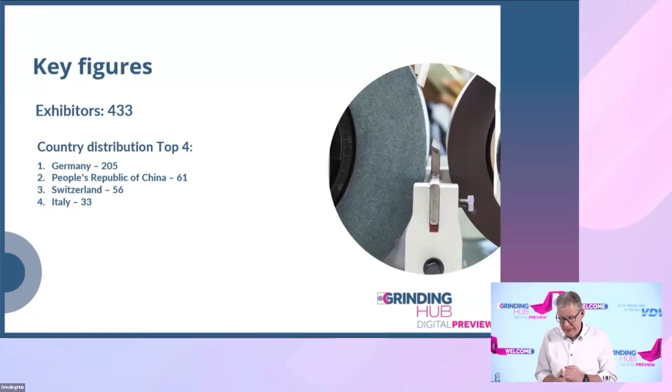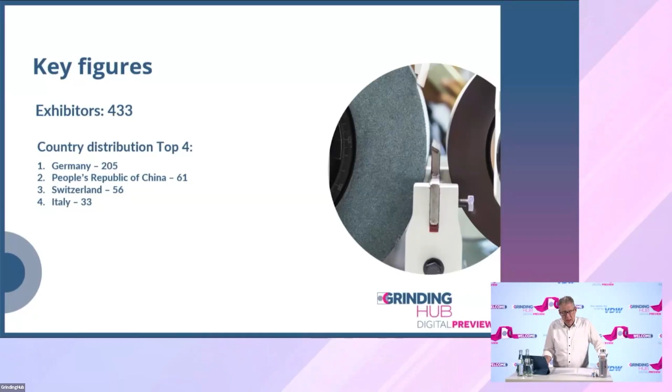Together with Swissmem, and the Grinding Pavilion Switzerland and small companies from Switzerland, we offer them a platform at our trade show in Stuttgart. And this highlights the importance of Grinding Hub. It's the international trade show with a clear focus on the European market, which is extremely important for us. But it is a market that we can handle very well and which is pretty stable compared to the other markets.

But we are also further developing in other areas. We are taking the next step with the Grinding Hub Americas, which will take place in May of next year in Cincinnati.

This is one step forward towards our visitors, towards our customers in the United States, and we are establishing the first and only trade show in North America dealing with the topic of grinding. Cincinnati, as a location, we've been discussing this for quite some time, is located at the heart of a central production cluster in the field of automotive and aerospace especially. And Grinding Hub is brought even closer to the most important markets, closer to the users and the decision makers this way.

Ladies and gentlemen, we are facing a very, very difficult market environment. We are facing numerous challenges, but also technological opportunities with the products of our manufacturers. And we really fought hard for our position in the global market. The grinding technology, the grinding industry is developing solutions that enhance quality and solve problems. In the end, the user of this technology is more competitive than before.

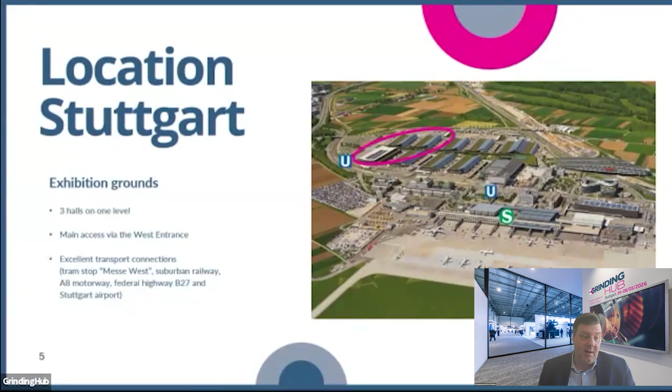So we are looking forward to the trade show in Stuttgart. We are there for you, and we are looking forward to the Grinding Hub 2026 in May.

I do not have to go into detail with all the companies - companies like Bosch, Daimler, Porsche. But on the other side, we've got companies that stand for innovative strength, and those are the companies that we need. So we are happy to have the trade show here in Stuttgart.

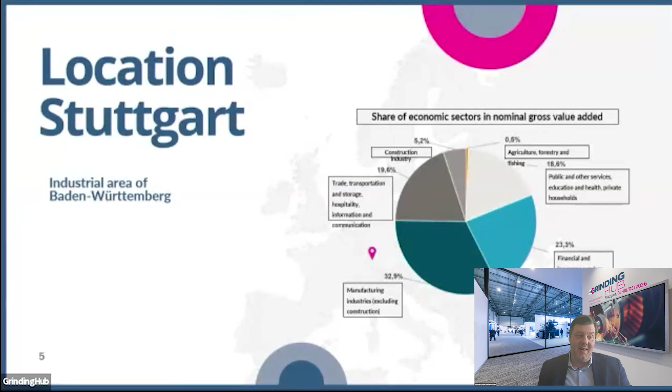So, some words about Stuttgart personally. I attend many other trade shows as well. So the trade show is one thing, but networking and evening events are the other side of the coin. And Stuttgart offers a variety of culinary diversity, culinary opportunities.

And May is an ideal month. Beer gardens are going to open then. The sun will shine, and I am looking forward to welcoming you in Stuttgart. Maultaschen, stuffed noodles, lentils, spätzle - you can enjoy everything, you'll find everything.

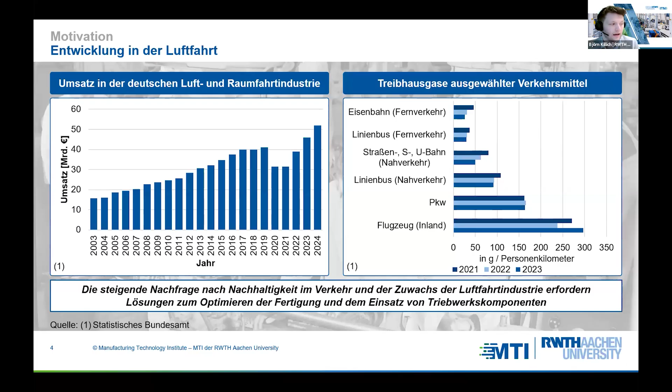All that requires solutions for optimization of processes and manufacturing processes if sales go up, but also using those jet engines to be more sustainable overall. In order to do so, the MTI, in cooperation with the Fraunhofer Institute, has different focuses that we research to reach this goal.

One is the manufacturing processes of safety critical engine components, and we want to propel them through digitization. We also want to optimize, for example, fuel cell stacks so that we can scale that possibility. So I will focus on the left side now, iterative steps of jet engines.

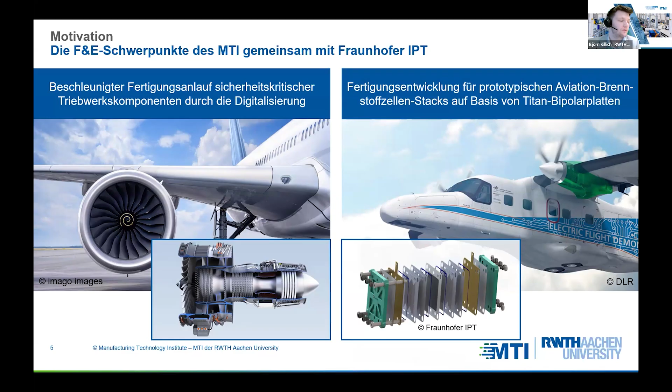So the case, if we have an optimization or further development of the critical components, for example, if you look at the jet engine on the left, there are high stringent requirements for higher bypass rates. Requirements for the parts on the right are even more stringent because they're very critical in the entire system.

So if we look at that stator and vane, there are different production methods. You do turning, grinding, broaching for the base of the stators. If you have a further development, for example with higher bypass rates, the requirements are even more stringent when it comes to materials and processes. Manufacturing needs to be more precise, efficient, and reliable for those critical components.

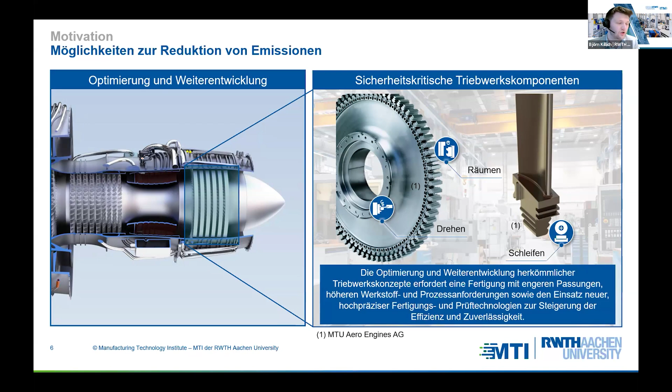If you look at the traditional manufacturing process, you have a defined set of parameters, and then you need to do iterations, trying to see that at the end you have a certified process that's relevant for aviation. And we want to support that.

So that was our motivation for that big production launch center aviation, to support that process. And we want to do virtual tests and optimize that with data.

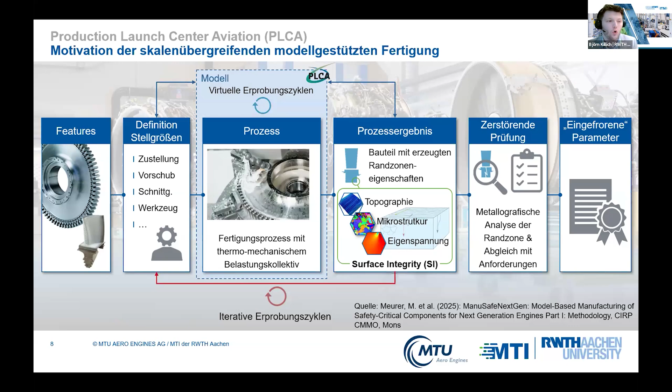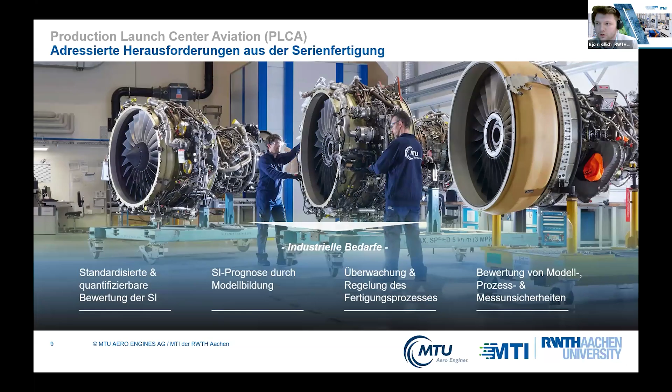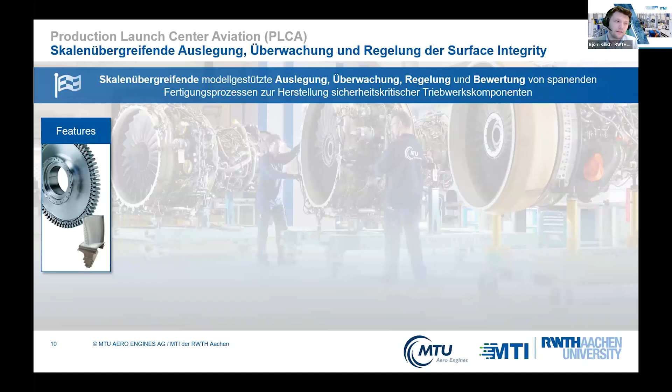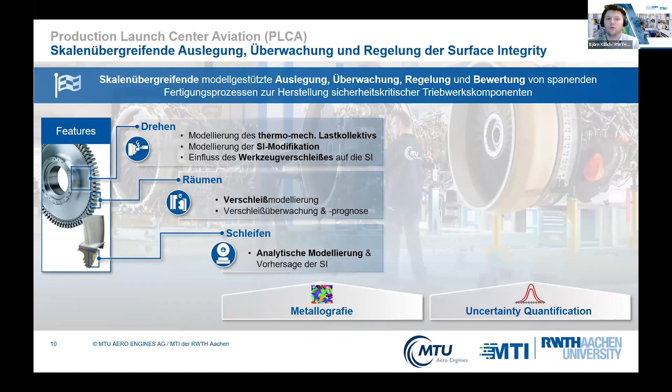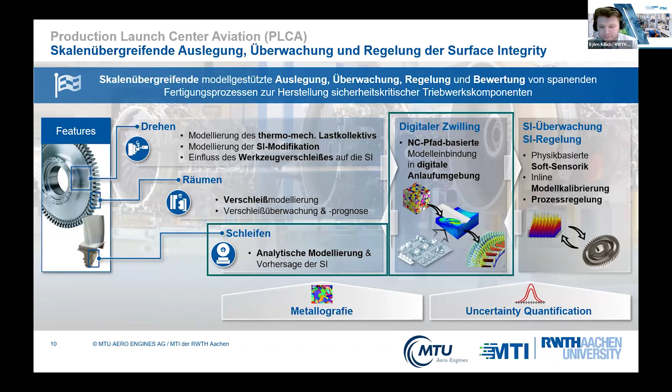So a brief definition of the digital twin and the different steps that are required. We have the product that detects data, and then we save those data in a digital twin, but we also receive information about the product.

So the different steps are: the digital twin describes what is happening, then there's a diagnosis and analysis of why it happens, and then a prediction of what will happen. At the end of the day, we have that prescription of how you act in order to reduce waste and optimize the process.

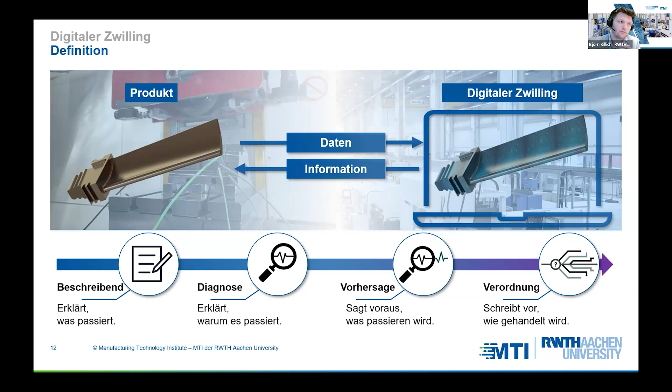So this digital twin can then also be used in a broad range of applications, and I want to focus on monitoring and process optimization. This is the target for grinding technology.

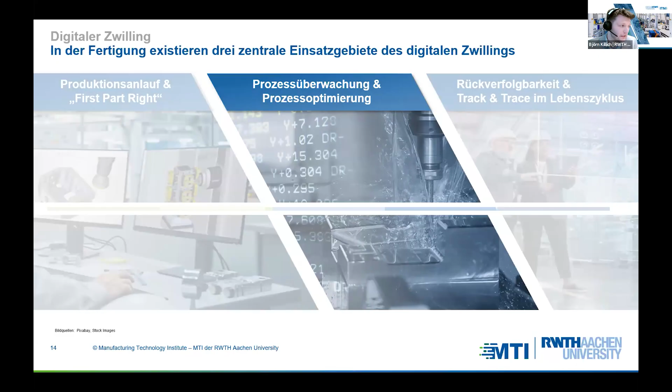We have our component and our machine, and we have different parameters that are set. That's why we have those process parameters that we can set, such as circumference speed, whatever can be adjusted and chosen for the process.

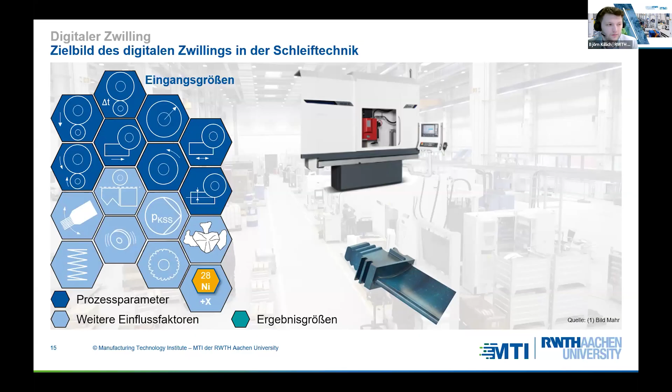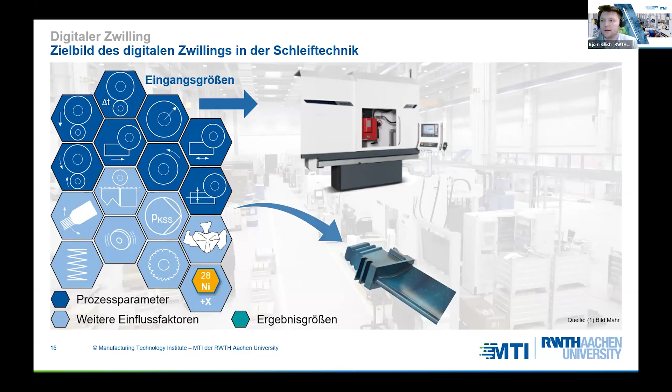Then we have different factors that we can add that influence the process, for example materials, profiles, grinding profiles, rigidness, or also lubrication feed. This is part of the machine, but it's also a data set in the digital twin, and then we do the process. Within that process we have temperature ranges and strengths.

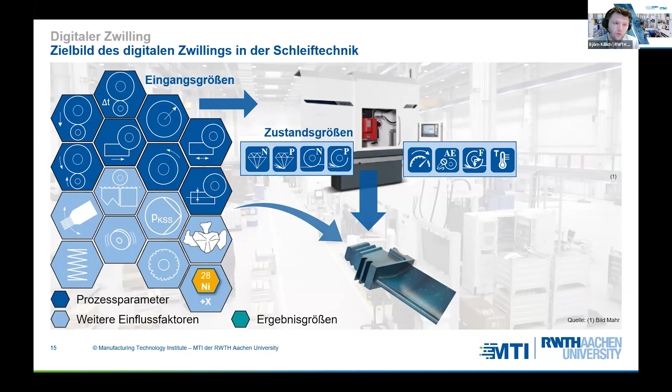Sound, oscillation, and so on and so forth will be recorded and give information. Then we can combine the two methods to have surface roughness, or edging, or the surface integrity, and be able to predict all that, and then do derivations and iterations for optimization.

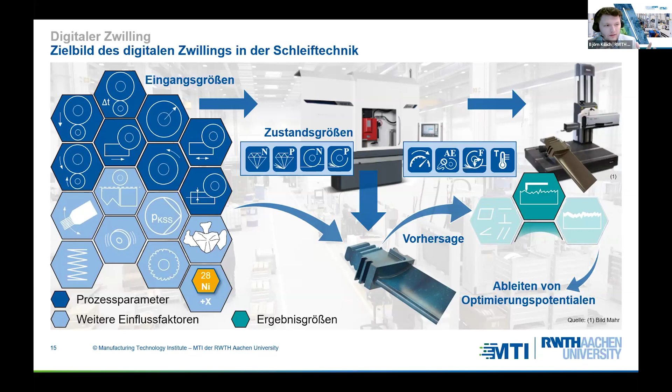And I'll take surface roughness as an example. So what have we done? We saw all the data that is required and all the variations that are required, so we've done the project.

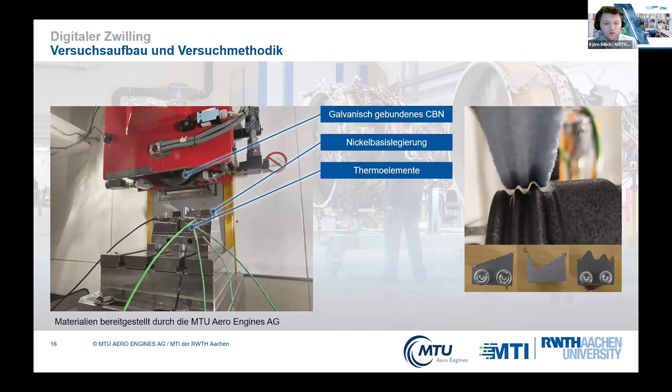We have our test rig on the left, and the green is temperature sensors and other sensors and probes that we have used. We have used a different range of grinding discs, nickel-based alloys, electrochemically bonded, and you see the test rig that records forces as well.

And we have a contact set up, and we have done tests with corundum discs as well because those are relevant for manufacturing jet engine components. Then you also see those profile dressing rollers and the workpiece profiles. We had straight profiles, but we also had those Christmas tree profiles that were grinded.

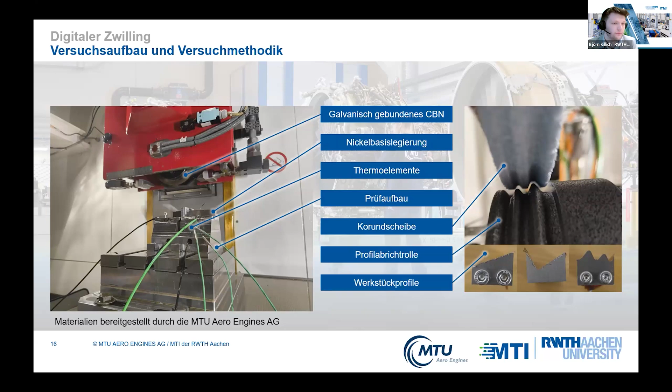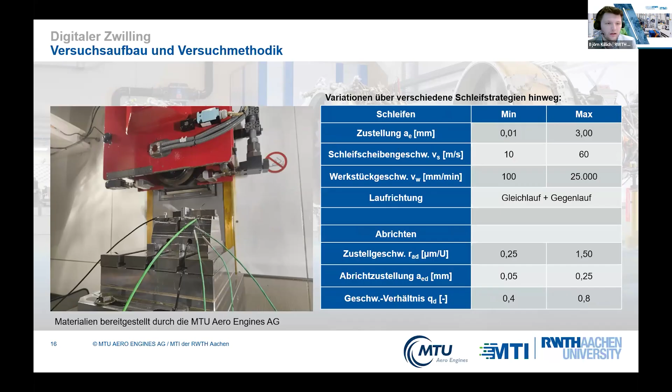And then we had different strategies. This is the process. Loop grinding, deep grinding, grinding speed, everything was changed in order to have a major data set. And then we corrected parameters, and at the end, we had this test rig.

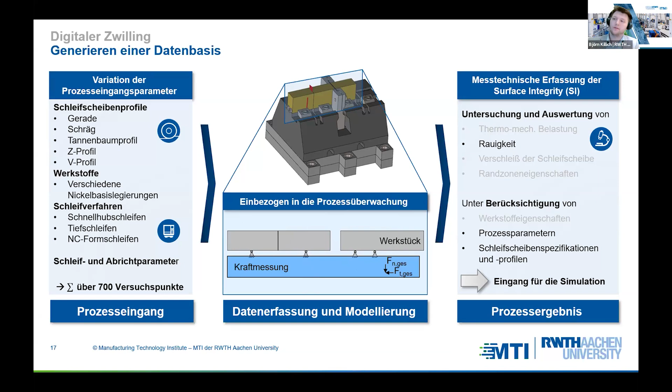In the middle, you see the measuring device that I explained. We recorded temperatures at the surface with thermocouples, but also inside of the material with wire probes. You see a measurement adapter in the middle used for additional temperature measurement. I want to focus on roughness in this case, so I took the temperatures out of this example, but temperatures are considered and subject to further research.

This is everything that was recorded in the process: temperatures, speed sensors, force sensors, and sound sensors. Those were external probes. Internally, we had the spindle performance, the axle position, and everything recorded, synchronized in time with LabVIEW software, saved and later evaluated.

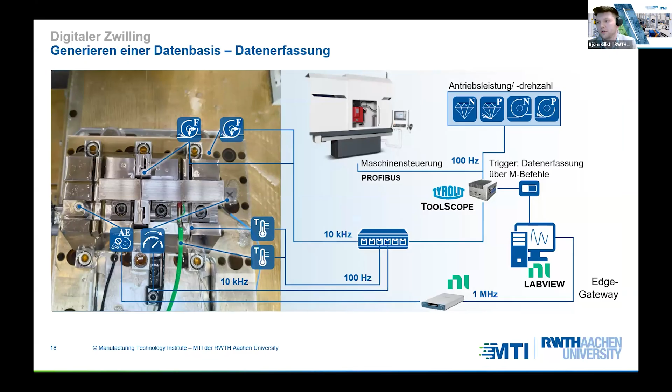So how can we monitor and optimize processes with that? What is the framework condition that is set? We defined boundary conditions: the geometry of the blade roots, the blade materials, and what are the requirements? The requirements of the surface, roughness, cracks, and what are the tolerances as well?

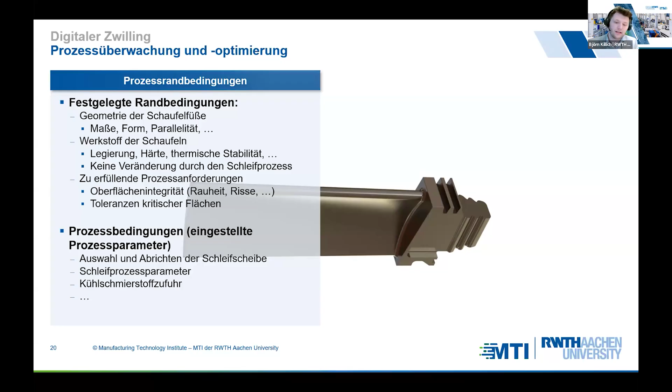Then we can adjust conditions such as selecting the grinding wheel, selecting which coolant, which lubricant, how we supply the coolant and lubricant, and all that also impacts the surface. And I can set the right parameter.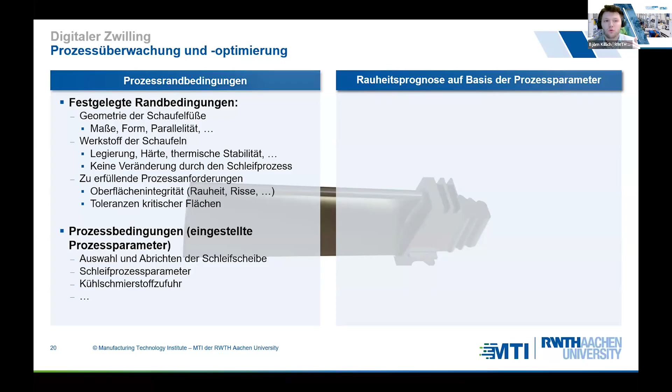The idea is that based on these set parameters, we can do a first forecast. So we have our process parameters such as feed, grinding wheel speed, peripheral speed, radius, and then we can do an analysis. But you need to consider that those factors impact each other, so you need to cover for that, and we have done that. We examined the interplay between the different parameters and had a prediction for the roughness.

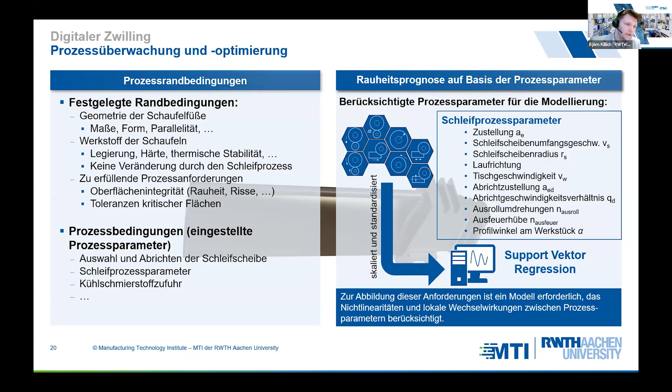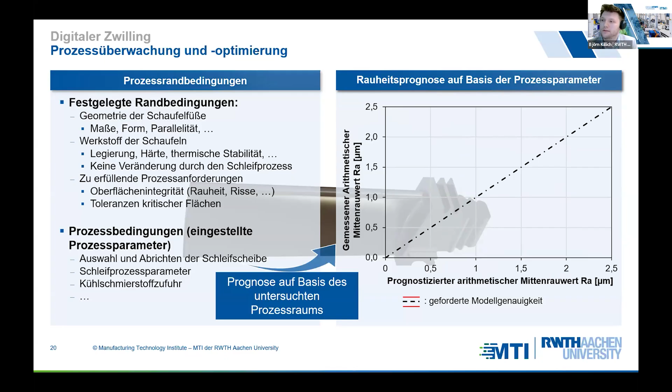On the y-axis I have the measurement, and on the other axis I have the forecasted range of the model. In other words, if I'm in the middle range, I have a very precise forecast of the roughness that I later ground. You can see that the model shows good quality, though some points are outside of the range.

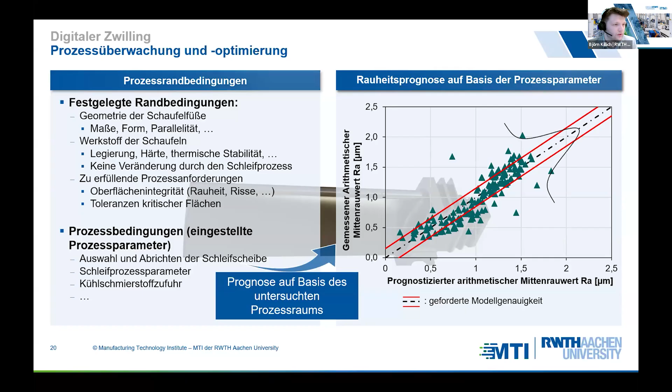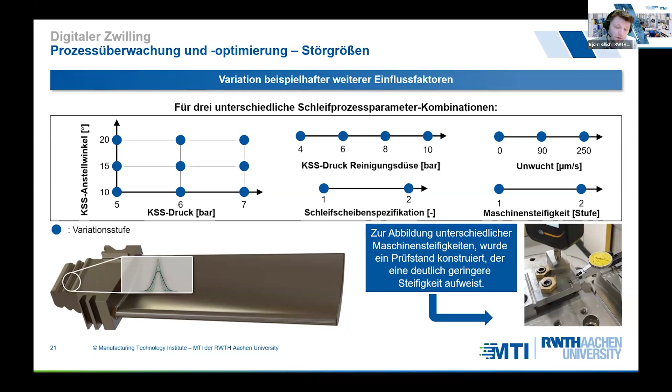And now you can ask yourselves why. That's why we further researched other impacts, such as nozzles, feed, speed of projection, and what grinding wheel is used, as all that can impact the process. As an example, the KSS angle with the KSS bar is shown, and you can see that the KSS pressure of 2 bar and an angle of 20 degrees can actually impact the roughness by 0.5 micrometers.

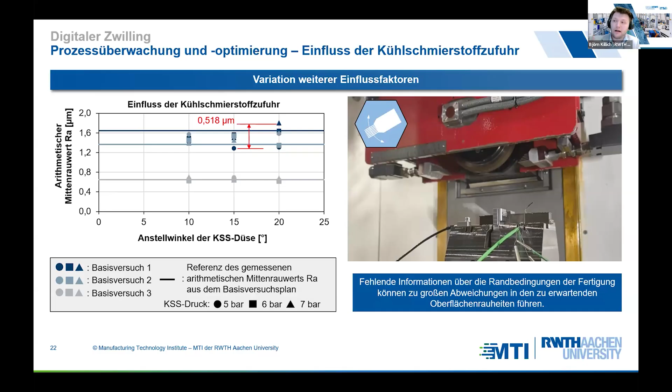In other words, if you want to know more about the process, you need to know all the framework conditions to predict the surface roughness in more detail. But if we don't know that, we can record data in the process, evaluate those data sets, and make predictions based on them. We have done that as well.

And we have done that for all the different features. There are different methods, different libraries. For each component that we ground, we had 21,000 features, and we chose 50 that best describe the process. We showed them here.

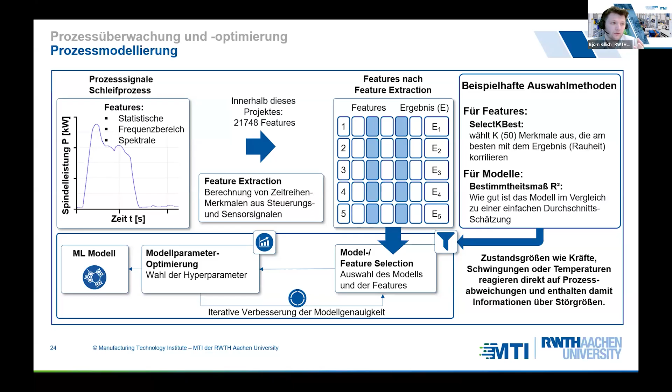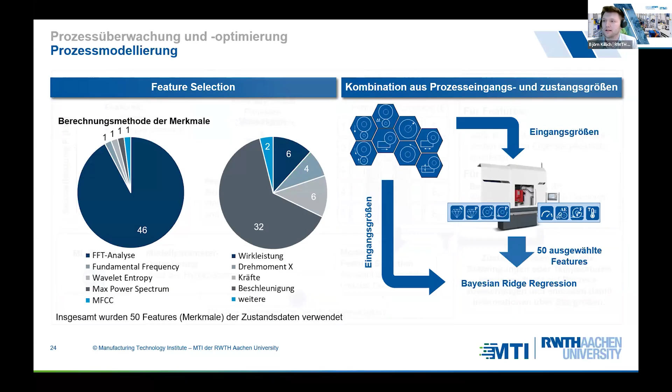For our analysis, we looked at frequencies, spindle performance, and speed values, and they were very predictable. In other words, those criteria, with the models we had based on the parameter set, give us a model that can replicate all the conditions and also reflect KSS nozzles and everything. So we have a very precise model.

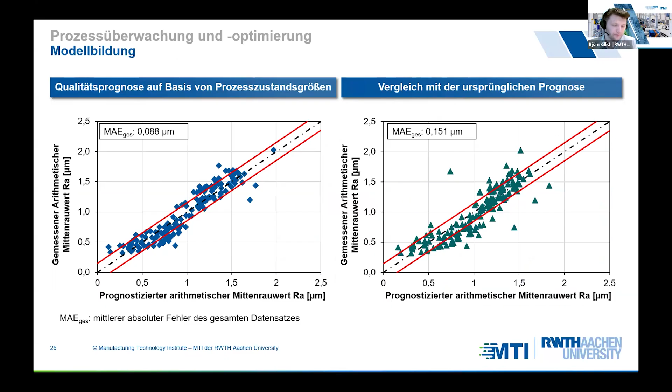By combining the set parameters of the process and the previous tests, we were able to optimize the quality, and we were pretty much within the required range. So now we are able to predict the roughness very well.

So now we can do a closed loop. We can see in the process if there are deviations, change something, and set it so that in the beginning of the process you can already see that the force is too high, for example. So I need to change the process at the very beginning, for example increase the disk speed, in order to reach my requirements, reduce waste, and also improve it for the following process.

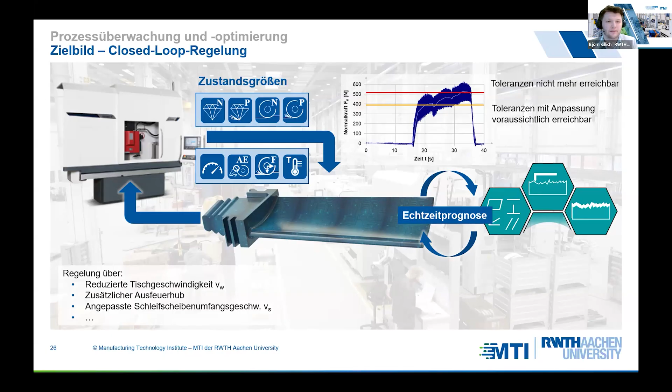In addition, we can also apply that to other components. We have done it for the roughness, but we'll also predict temperatures and forces. We also want to test wear and tear and other parameters, so we can model all those features, and then in a last step apply that to batch production, series production, which we are already starting.

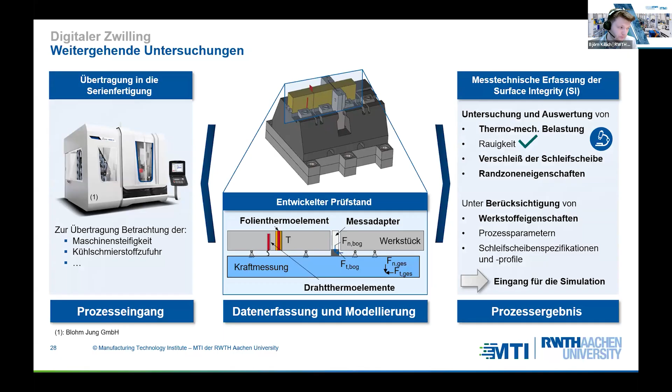The conclusion is with digital twins, you can already forecast your process, but you need to have as many framework conditions as possible. In addition, the nozzle angle of lubricant, or the pressure of lubricant, is important and has an impact on the processes. We recorded the tests, and therefore you can also correct and improve the forecast.

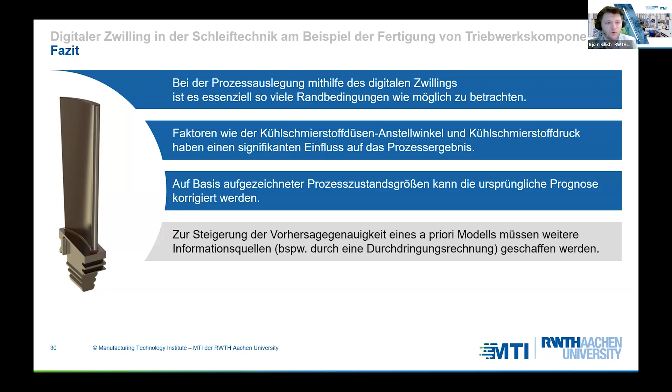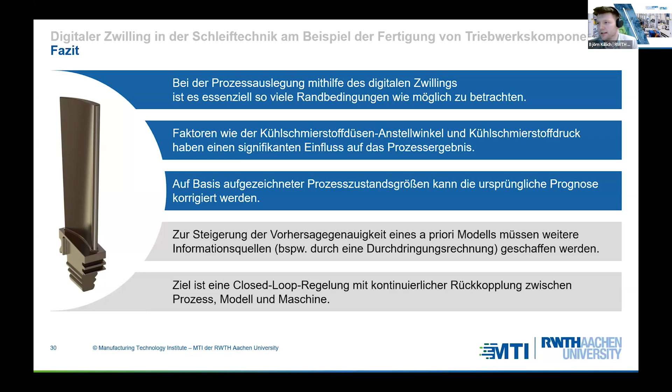In order to improve, we need more information on the machine and on the process. For example, back it up by calculations, the contact between grinding disk and material or component, and do further improvement. And then do a closed loop control system with a continuous feedback between process model and machine, and further optimize the manufacturing process. Thank you so much for your attention, and this is the end of my presentation.

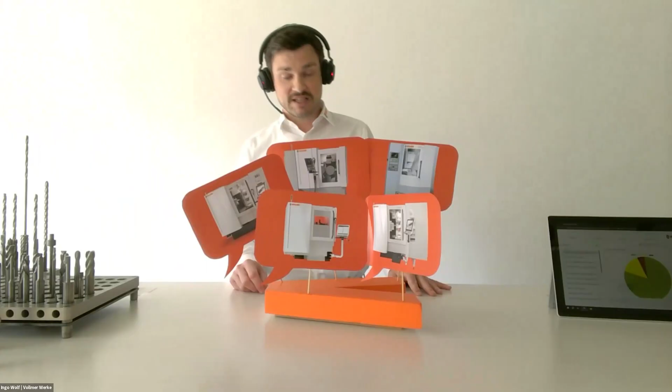Our approach as full line supplier for each application is to provide the most efficient machining strategy and process reliability. We exhibit these products at the Grinding Hub, and we are going to show some of our most important machine solutions. For example, V-Laser 370 is a high-precision laser machining with extremely simple and intuitive operation, and we've got a patented concept, so for machining it only uses very few compensating movements while setting new standards of machining efficiency.

We also got V-Grind Infinity Linear, which is our all-rounder in terms of grinding, from micro tools to bigger dimensions. And we also got the V-Hybrid 260, which is a combination of grinding and eroding in a single setup. We've got new features here, such as groove polishing, eroding, and grinding of round chamfer, and also round eroding, and our customers have access to machining options that are unique on the market. As I just showed the machining of circular saws, we got CS8060 and CP650 to show.

But not only hardware is important for us, also the whole topic of software, digitization, and AI is very important for us, and this is what we want to present at the trade show. Many of our customers already know our digital customer portal, V-Portal, but we also got our Vollmer Smart Hub that we want to demonstrate. This is a central platform providing process data, condition data, they are visualized, they are analyzed, and here we're also using AI.

Very warm welcome, everyone. Thank you very much, and thanks to VDW for giving us the opportunity to present our company briefly. My name is Jürgen Waldhas. I'm head of sales for machining and tools, responsible for machines and tools, as well as strategic market development and international customer support.

Who's DOPA? DOPA is an international company based in Berlin. We are specialized in comprehensive solutions for grinding technology and polishing technologies, and also modern process landscapes.

The company develops, manufactures, and integrates high-performance grinding tools and machines, and the associated auxiliaries, accessories, and operating materials, especially for machining hard and brittle materials such as glass and ceramics, as well as demanding metal applications. This results in fully coordinated, complete solutions that are seamlessly integrated and ideally tailored to the requirements of the respective manufacturing process.

As a partner to the industry, DOPA combines in-depth process expertise with digital competence. The company supports customers in process digitization and optimization, and also in automation, with the aim of sustainably increasing efficiency, quality, and cost effectiveness for our customers. That's what we want to do.

The close integration of engineering, application technology, and data analysis results in solutions precisely tailored to the respective production requirements. Customers benefit from measurable performance improvements, stable processes, and future-proof technology.

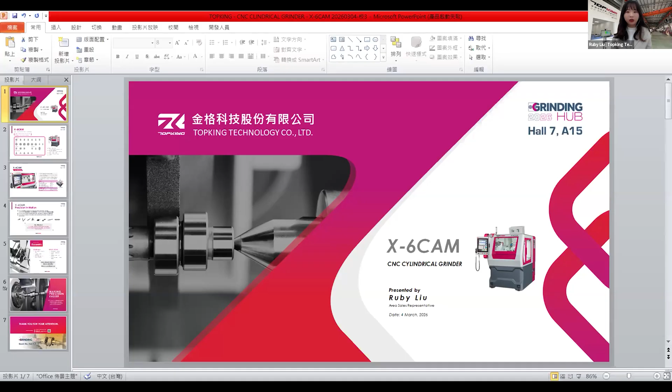We specialize in researching, developing, and designing grinding machines for cylindrical and centerless grinding. Our mission is making manufacturing simpler, more stable, and more efficient.

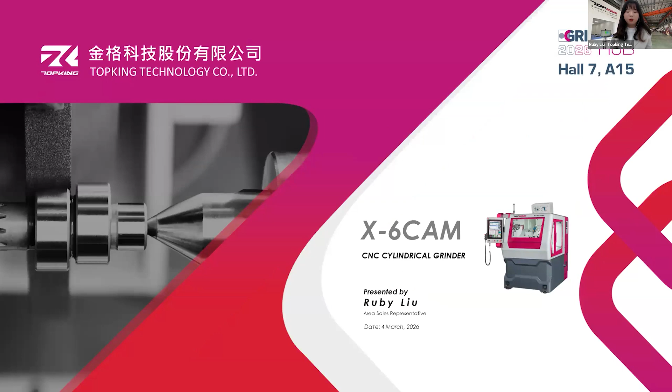I would like to talk about the X-6CAM. It represents a transition from traditional graphical interfaces, with reduced setup time, lower skill dependence, and stable quality.

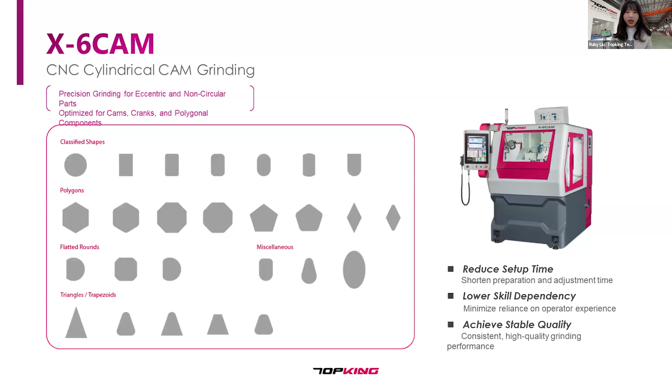There are four main features. Number one, powered by Siemens Sinumerik One, featuring a graphical, conversational, intelligent interface.

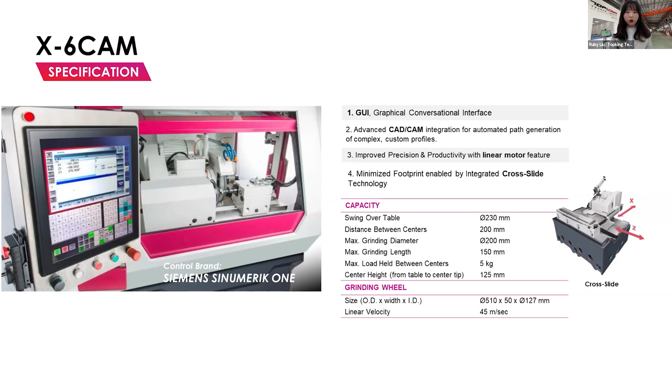Number two, CAD and CAM integration can convert drawings into grinding paths. Number three, linear motor technology ensures high accuracy and stability. Number four, cross-slide design saves more floor space.

Next I'd like to talk about X6 Cam. It is usually suitable for camshafts and medical punches. X6 Cam series focuses on non-concentric features and simplifying complex programming, ensuring precision and stability.

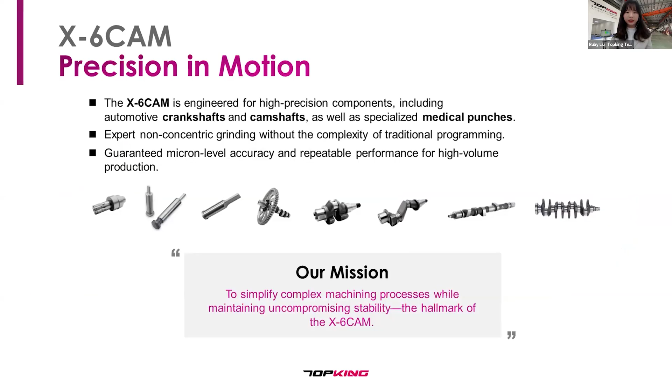I'd like to share a real case with you. One of our customers used eccentric fixtures for years, and as demand for precision increased, setup became highly dependent on operator experience.

With our conversational interface and high-point measurement system, setup time can be greatly reduced and grinding starting points automatically determined. Optional features like gap control and automatic grinding wheel balancer enhance safety and stability.

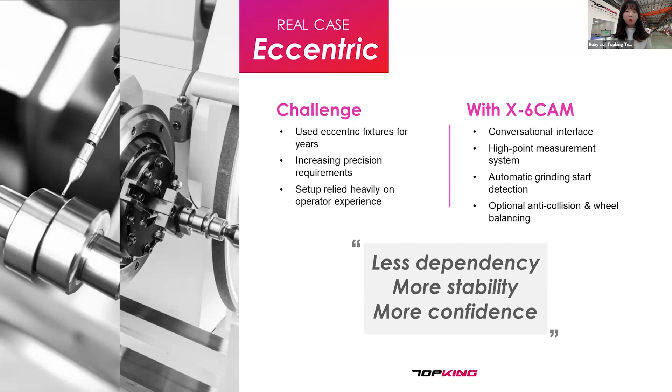So what is the result? Less dependency, more stability, and more confidence. We believe that in the future, grinding will not only be simpler and more accurate, but will also reduce the complexity of diverse operations and make stable production easier than ever.

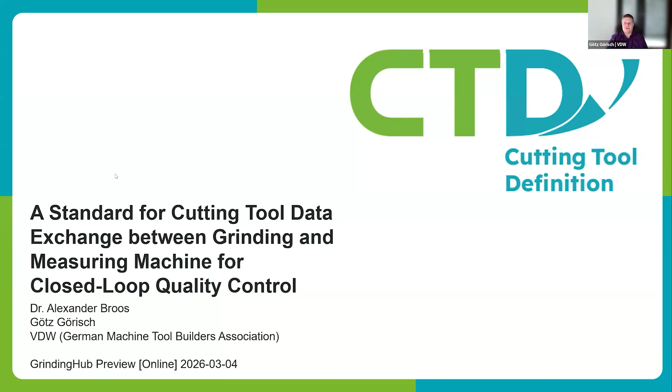A lengthy title, but long story short: when you produce manufacturing tools such as mills or drills or other cutting tools, you usually have a closed loop quality assurance process between the grinding machine that grinds the tool and the measuring machine that performs quality control.

Ideally, you want to feed the quality information from the measuring machine back into the grinding machine, so you can have automatic adaptation and adjustment of the grinder to increase the quality of the products you produce.

This is not really new, as there has been a standard known as GDX, Grinding Data Exchange. The issue with that old standard was that it lacked further standardization and adaptation to today's needs, and it did not define a unified interface for exchanging the data.

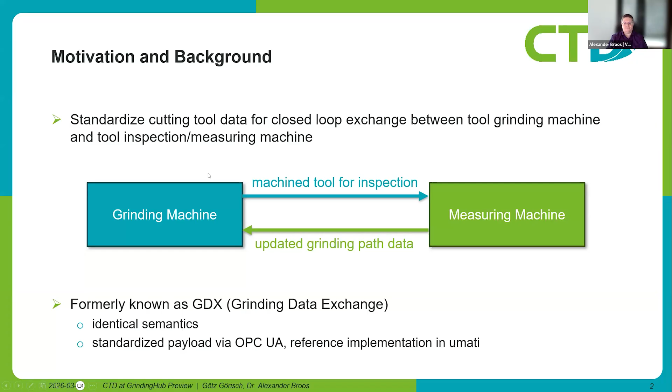We solved two things. We are a group of international partners that supplies tool grinding machines, measurement machines, software, and research in that area, and of course the users - the companies that actually produce these cutting tools.

We standardized the data definition - the data representation of various cutting tools that are produced. As usual with standards, you have to give some basics and definitions, and then you can define individual products like milling cutters, drills, and reamers.

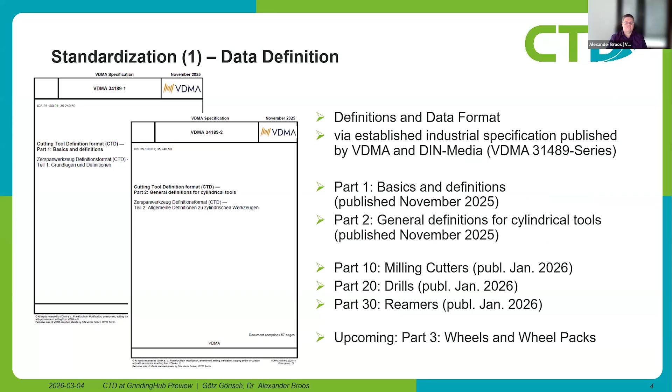We are going into more detail, as standardization usually takes quite some time. To give you a short impression: if you have a cutting edge contour, you have to provide various lengths in a coordinate system, including radius. The important thing is to name it identically for everything, because that really enables easy setup of data communication between the milling, grinding, and measurement machines.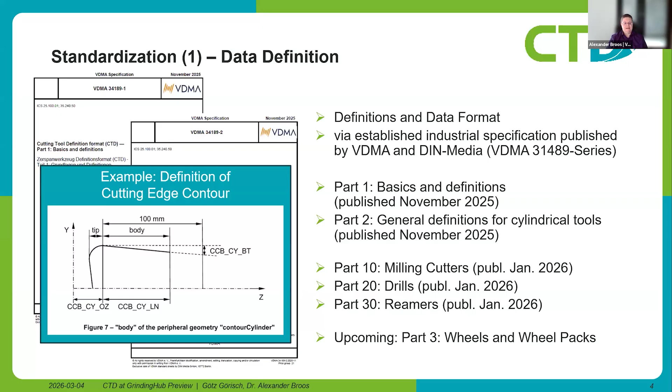Once you have defined all this data to describe the critical parameters of your product, the second thing is you need to facilitate the actual data exchange.

That means, what is the interface and what is the payload to transport this data back and forth between the measuring machine and the production machine. For this, we relied on an established technology: OPC-UA. As we also represent the connectivity initiative Umati, we already implemented that in Umati, so it's ready to show, ready to use.

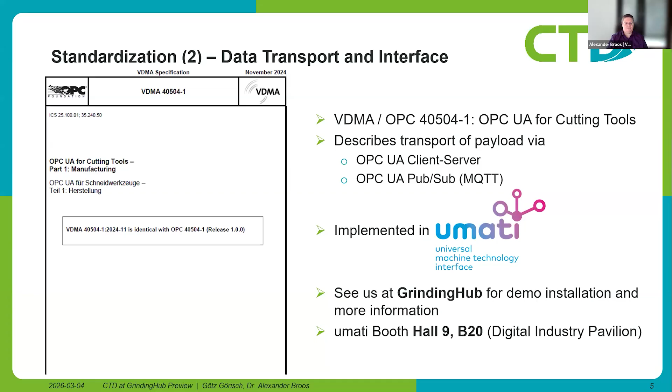Of course, I could only give a small impression into what's going on here. So the invitation is: see us and all of our partners at GrindingHub, and then we can discuss in detail how this might work out for you, whether you're a producer of this kind of machinery or a user of it. We are looking forward to seeing you. Thanks for having us, and have a great afternoon.